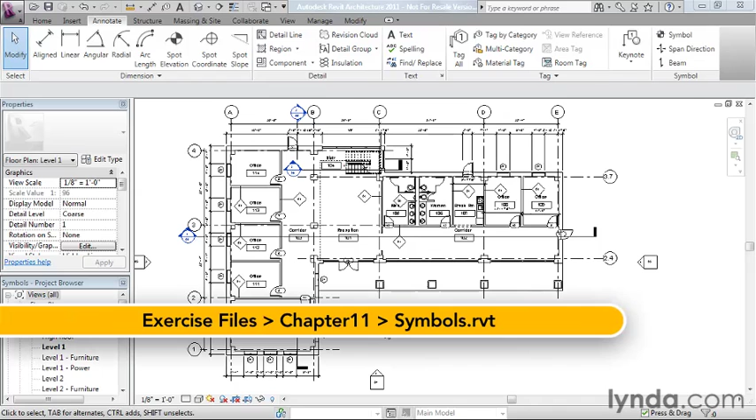Construction documents incorporate many kinds of symbols. Revit has dedicated tools for text, dimension, tags, and keynotes. For any other kind of symbol, we can use generic annotation families. Such families can represent any symbol we require.

I'm in a file called Symbols, looking at a first floor plan, and we have a couple symbols that are already in the file based on the template we started with. On the Annotate tab, way over at the right, we can find the symbol tool. These are just generic annotation symbols, and there's a couple loaded in here. Let's start with a north arrow, pretty simple north arrow. You can just place that somewhere down in the corner of the drawing.

Now, if I click on it, you may be expecting the north arrow to actually know what direction north is, and that wouldn't be an unreasonable expectation for somebody using a program like Revit. But it turns out the north arrow is just a generic annotation symbol. It doesn't have any quote-unquote smarts built into it. So you literally have to select it, go to rotate, and put in some sort of angle for whatever north is. Let's say north was at 20 degrees. We put in 20 degrees and press enter. Now it turns out that when you click the symbol tool, there's an option where you can check 'rotate after placement,' which takes you right into the rotation option after you place the symbol.

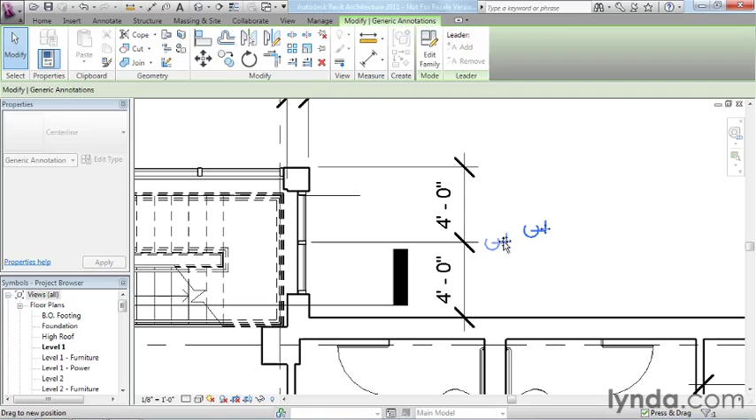Okay, let's look at another example: the center line symbol. Really simple symbol. I'm going to place it over here, toward the top of the plan. Click Modify, zoom in like so. We've got these two dimensions here, where it's an equal dimension. Let's select this symbol, click Rotate again, type in 90 degrees, and then use the little move handle that's on there and just drag it like so. That tells us we've got a center line right there.

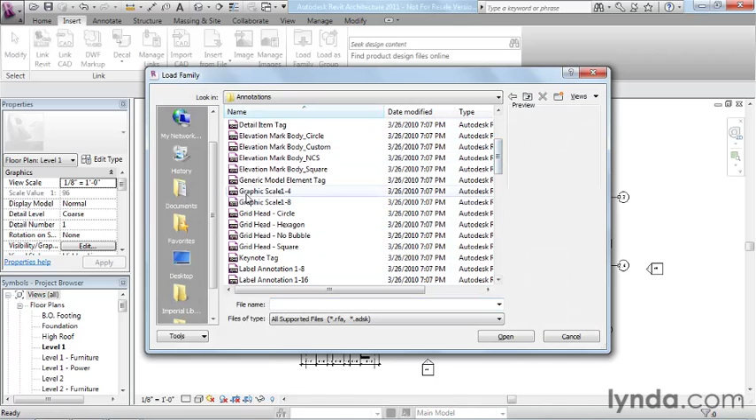I'm going to do ZF for zoom to fit, so there aren't any more currently in this project. We'll go over to the Insert tab and click on Load Family. That takes us to our library folder like we've seen in previous movies. I'm going to go to the Annotations folder and scroll down a little bit, and we've got a couple graphic scales right here. I'm going to choose this one, 1-8, and click Open.

Go back over to my Annotate tab, click on the symbol tool, and see the graphic scale is listed there. I'll go ahead and place it right about here. Now, it's a little tough to judge the actual scale here, but if you zoom in on this, if we were to actually measure these points, it is accurately telling us the distance. I'm going to zoom previous.

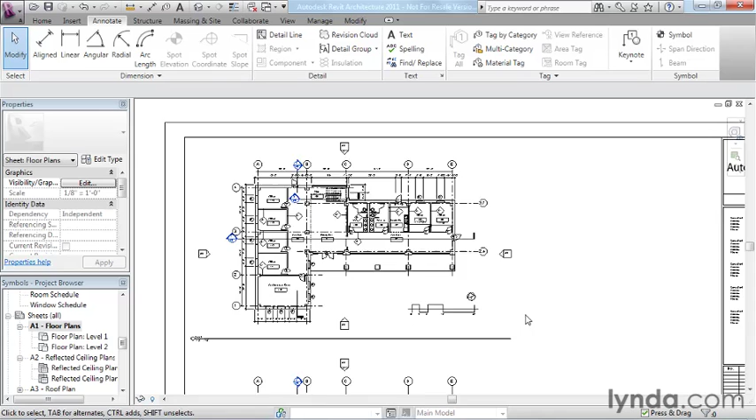It might be easier to see if we open up our floor plan sheet. So here's our floor plan sheet. We'll zoom in—this is our first floor plan, and you can kind of see the graphic scale there with the north arrow. It looks a little better in context when you see it surrounded by the rest of the drawing, and how it sits on the sheet makes a bit more sense.

So those are some different symbols that we can add into our projects. If you don't have a quote-unquote smart symbol for the task you're trying to do, you can basically create these generic annotations, which, again, aren't terribly smart in the sense that they don't react to things or link to anything, but they do the job of giving us the symbol we need.

There are a few other types of items you might want to look at—we've got spot elevations, spot coordinates, and even slope symbols. No computer design program would be complete without the ability to add various symbols required by architectural documentation, and Revit is no exception. In this movie, we saw just a few simple examples of the symbol tool in action, and we can use those to put the finishing touches on our various drawings and plans.